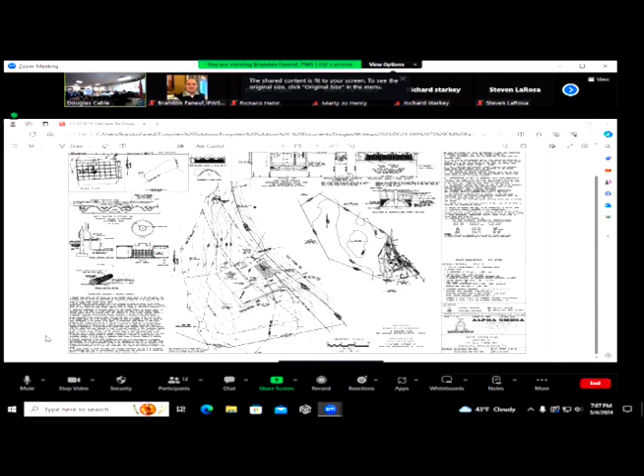All right, so here is side by side what was approved before. That's the house size and the septic, and that's what's approved. What we're proposing is a much smaller house, much smaller septic.

The only difference is that the wetland used to be only to the property line here, but we found more wetland in this area, and we flagged that. Brandon walked the site today, and he moved one of the flags a little bit farther, but it didn't affect much on the project. Other than that, all the work is outside the 50-foot buffer except a small corner of the house. We came a few weeks ago to talk about that before we submit the plan.

So this is what we have right now. The septic is outside the 50-foot buffer and the reserve. We have the well right there. No work basically in the 25-foot no-disturb area except the well area only, which is temporary alteration. Other than that, it's much smaller house, much farther away from the wetland, as you can see.

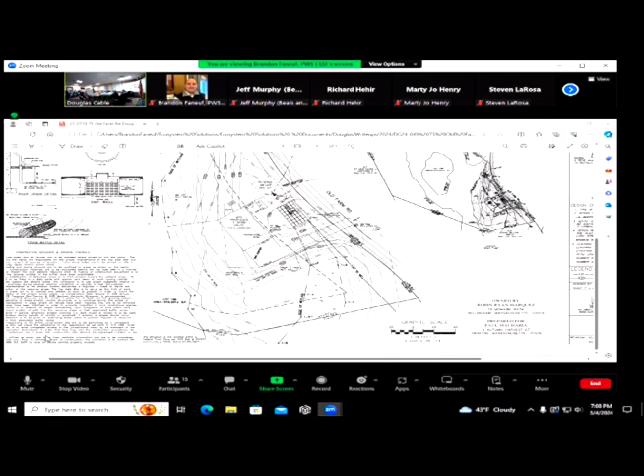Okay. Over there, and start sharing those. What you can do is start right here, then you can just scroll through them like one every 5 seconds or so.

So the wells, oh, I see it on now. Yeah, okay, I see it down. It's almost the same location as the old well, the approved well location.

That's still not in the 25 foot. The well, it's close, but yeah, it's close. But that follows only the line that's down, is only temporary disturbance. Just drill the well and never touch it again. It kind of circles around and it comes out. That's for the well pit itself, during the construction. Yes, okay.

And Brandon, he walked the site today. The flag he flagged was moved about 10 feet north, and we were able to adjust that in the revised plan.

Okay, Brandon? Thank you, Mr. Chairman. If you look up at the screen, you'll see a general overview of what the site looks like. It goes downhill from the road. That gives you an idea of the grade change, because in order to make the road level in that area, they had to build it up.

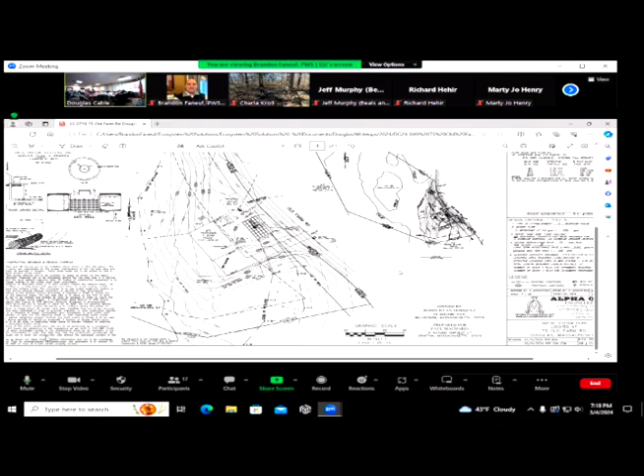Also, my well isn't really shown on this plan. There's just a line here saying 'to well, 135 feet,' but I've never been notified that a surveyor was coming onto my property to measure anything as an abutter, so I don't see how they could have located that accurately to determine the distance. I also haven't seen anybody, and my cameras haven't picked up anybody, which they would have.

So yes, I question all these things. Also, wells have to be 50 feet from a septic tank and 100 feet from the leach field, and none of these things can—both the septic, leach field, and the home cannot be in the 50-foot buffer zone, and in this proposal, both of them are. So it doesn't qualify as far as our conservation bylaws, and it also doesn't qualify because of the Title V issues with the plan.

That's, I think, all I have to say. I had a—

$3,000 well repair when a home was built across the street. My neighbor, he's present as well. And then his neighbor next door, his septic system, which was approved by the Board of Health in Douglas, failed. I wound up having a $3,000 well repair, and I saw the well repairman at several homes right in the adjacent area when new homes went online. So that's my input. I don't see how you can approve something that doesn't comply with both our wetland bylaws and Title V.

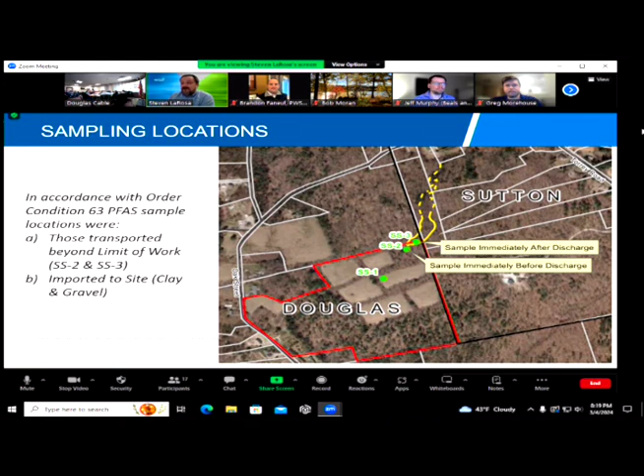And then that way we were able to dig into those 2 piles of imported material to analyze those. The results, I know there's a lot of numbers here, but the sample results are the last 3 columns for the RCRA 8 metals and phosphorus. We did see a number of these metals, which are naturally occurring, so we didn't expect to not see them. All of the concentrations observed from all 3 samples were below the reporting concentrations for sites within 100 feet of a drinking water supply in Massachusetts.

And one column here talks about natural soil. These are the concentrations of those metals anticipated in soils. All of the concentrations we observed were within those numbers or less than those background concentrations.

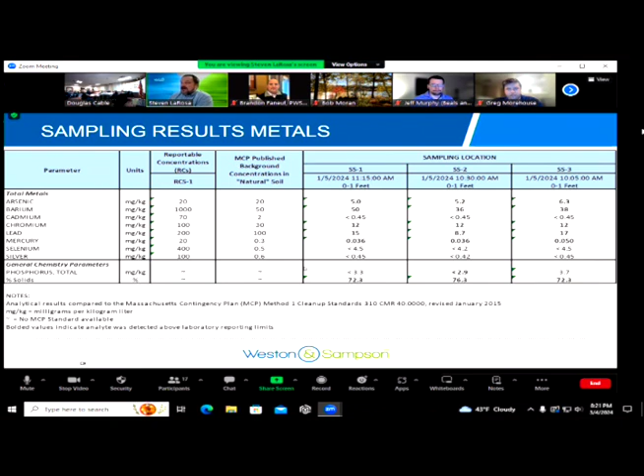For the PFAS concentrations, again the last 4 columns here are the samples we collected. The easy ones are the imported clay and gravel. There were no PFAS identified in those samples of any of the 40 that we could see. In the SS2 and SS3 samples, what we're showing here are all of the compounds identified within at least one of those samples and the state of Massachusetts regulated compounds.

So these middle 6 compounds are the ones regulated by Massachusetts. All of the concentrations of PFAS that we saw in our samples are below those reporting concentrations. Additionally, I've included some background concentrations developed by the states of Vermont and Maine, and all of the PFAS concentrations we see in our soil samples are below those typical background concentrations seen in those other 2 states.

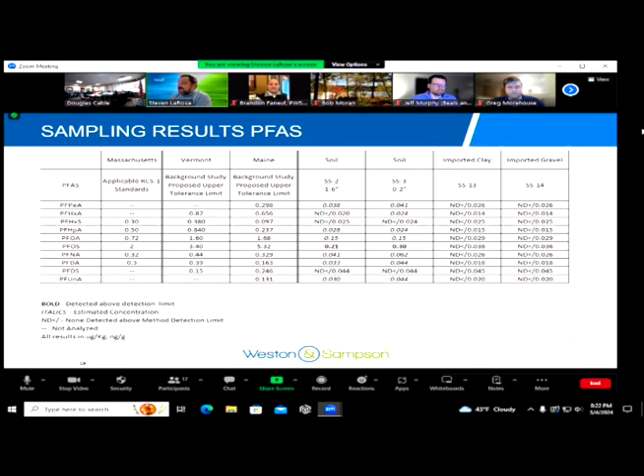So our conclusions: the soils associated with the property contain RCRA 8 metals at what are deemed natural soil background concentrations for Massachusetts. The PFAS samples for soils on property show concentrations well below the Mass DEP reporting limits and even below the background concentrations seen in neighboring states. The imported materials contain no detectable levels of PFAS.

So we believe that the Conservation Commission order required soil sampling has been completed and that the results indicate there are no contaminants here associated with all the analyses we've done, and that no additional sampling or analysis are warranted. Okay.

Brandon, you got anything? On this first topic, yeah.

Okay, so guess some updates from the last time we talked. The Conservation Commission required that the applicant's engineer relook at Basin 5 and its functionality.

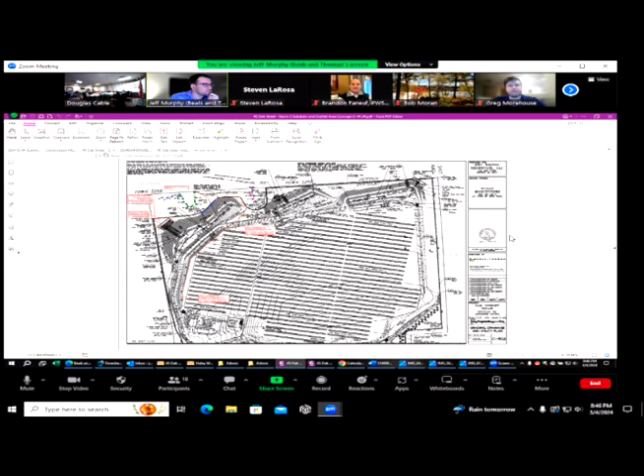And then I think we've talked about Basin 2 - the way that's being addressed in the short-term construction period is that water from that basin, now much further along, the wick drain pipe is now installed in the floor of the basin. As Pat said, as conditions allow, when there's another good window of weather, that's when they're going to install the outlet control structure, outlet pipe, and the outlet pipe from the wick drain. In the construction period, so they don't have to rely on dewatering the basin through pumping,

the wick drain is going to be the mechanism in the short term that will allow them to draw the water down in the basin as needed, versus pumping it. But obviously continuing to monitor the conditions - that can only be done if the water is sufficiently clean to discharge to that location. So of course they'll be monitoring that as conditions go forward.

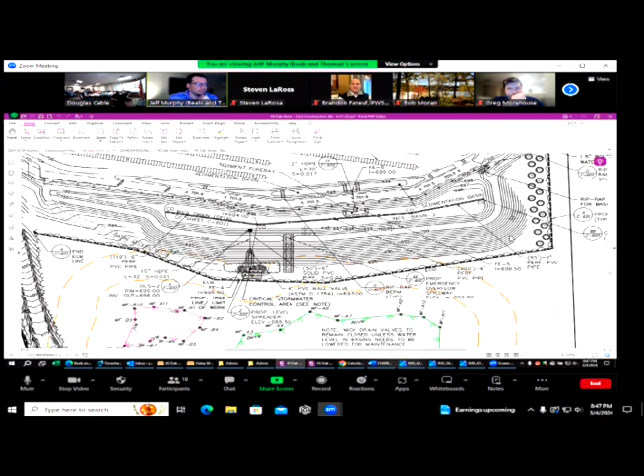So the 6-inch ball valve, that's what's draining down the sediment ponds? There's a wick drain underneath the pond that's like a 6-inch perforated pipe, and then there's a solid pipe that leaves the wick drain, with a valve on the end that can be regulated to control the outflow of the wick drain, which discharges into the riprap swale that goes to the level spreader pool at the base of the slope. And that feeds off that pipe on the bottom of the retention pond? Yep, so that's the wick drain, but that's not the main drain of the pond.

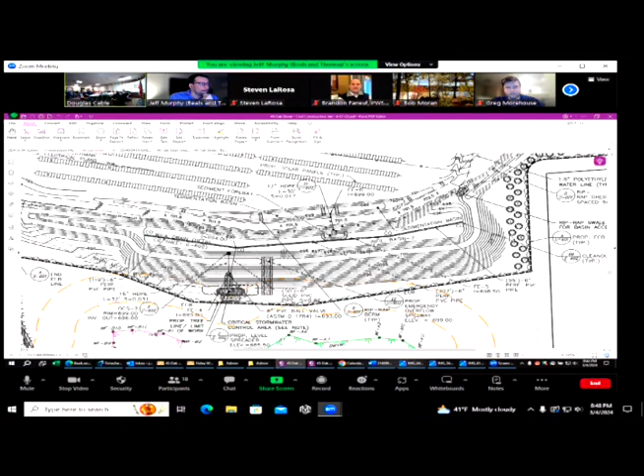Well, what I'm getting at is, there's another main drain - the silt's going to settle to the bottom, right? Right. And now you've got a pipe there that we're going to open up and drain out, so the silt's going to go with it. So it's wrapped in fabric, and it's got crushed stone around it - crushed stone, fabric wrapped around it, crushed stone, then a layer of crushed stone on top, and right now we've got an additional piece of fabric on top to keep the stone clean during the construction phase. That would be taken off and replaced. Once the site is fully grown in, we'll take that top piece of non-woven fabric off.

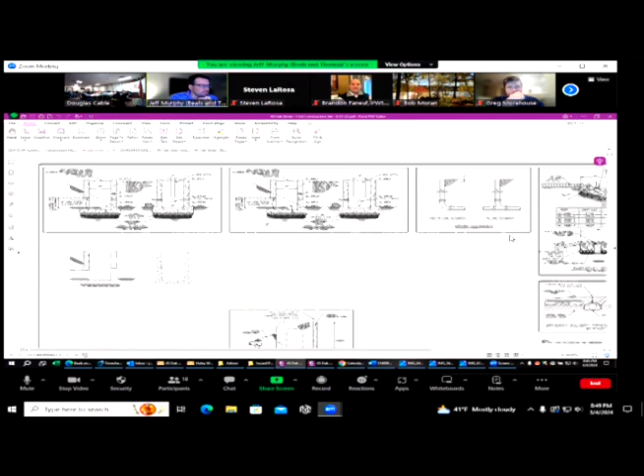I'm just trying to get an idea of how this thing's supposed to work. So that's the wick drain, but the main function Jeff could probably explain is the outlet control structure. Yeah, so each of the basins have a unique outlet control structure. So this is the detail for Basin 2. So the basin bottom is here. So this structure is going to be facing inwards towards the basin, the side of the structure.

So it's going to allow the water in the basin to pond up 6 inches before it reaches this lowest outlet orifice. Once the water gets to that 6-inch depth mark, it will flow through this opening and then into the outlet control structure. This on the left is a side view. The water will come through the structure and then into that outlet pipe.

And then it'll go into that riprap swale that you saw on the previous plan that goes to the base of the slope, to that oval-shaped level spreader pool, which is intended to fill up. It has that concrete curved weir that is going to spread the water flow out across a wider area before it leaves the limit of work.

Okay, so I guess short term, the water in the basin is going to be managed through pumping until such time that the water is clean enough that they can start to use the wick drain to release the water.

And then certainly once the vegetation starts to grow in the spring, that should improve the clarity of the water entering the basin as well.

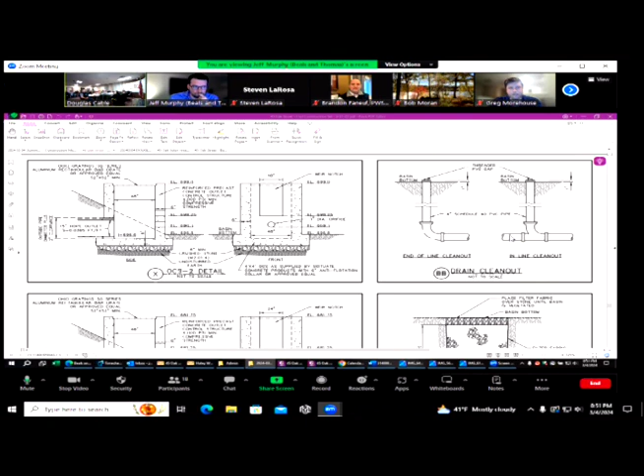So basically, the way this works is that the bottom of the pond really isn't accepting water. You're doing it through the 6-inch pipe, correct? To control the level. So the wick drain is really meant to be a maintenance tool.

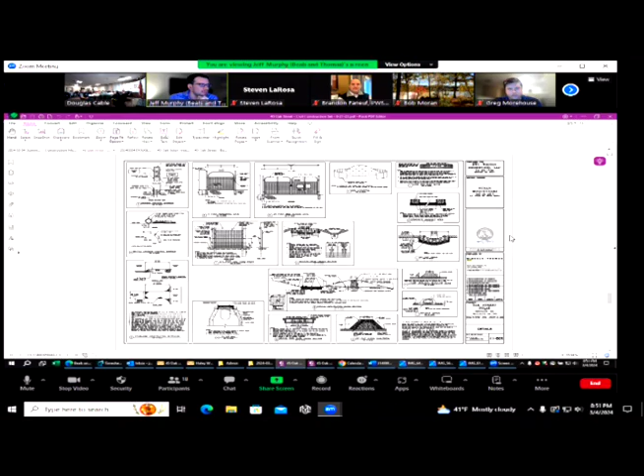So in the long term, the intent is, here's kind of a quick cross section. The wick drain pipe is installed, it's basically a stone lined trench in the floor of the basin.

So in the long term operations, the goal is to have that wick drain pipe just basically sitting there, and then have the valve closed, and the water will pond up to that 6-inch mark before it actually flows out of the outlet pipe.

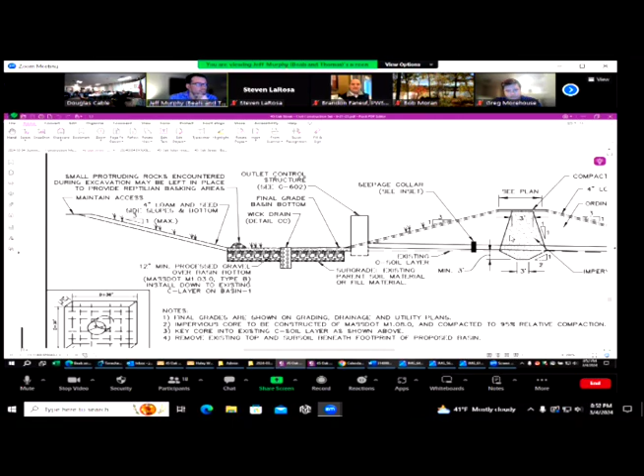So we're essentially impounding that first 6 inches of water, and that's the goal of what we ideally would want to infiltrate into the soil below, which we know is probably going to go very slow.

But again, we did install this gravel layer at the bottom of the pond, and they mucked out the sediment that was there before installing that gravel base there.

And they're likely going to have to do some additional rehab and scarification of that towards the end of construction, after things become more stabilized.

And one of the things that we did talk on site about with Brandon and Doug Bush of Haley Ward was, originally we had intended to loam and seed the bottom of the basin, but given what we've seen so far with the soils being so poorly infiltrating, we're throwing around the idea of potentially not putting loam and seed down on the floor of the basin.

And trying to just keep that gravel layer, in an effort to basically improve or create a best case scenario for the water to be able to draw down. The side slopes will still be loamed and seeded, but just the floor of the basin, we're thinking it may be best to not do that.

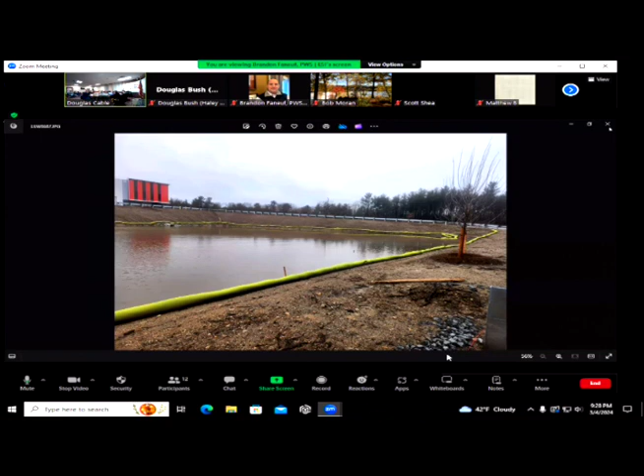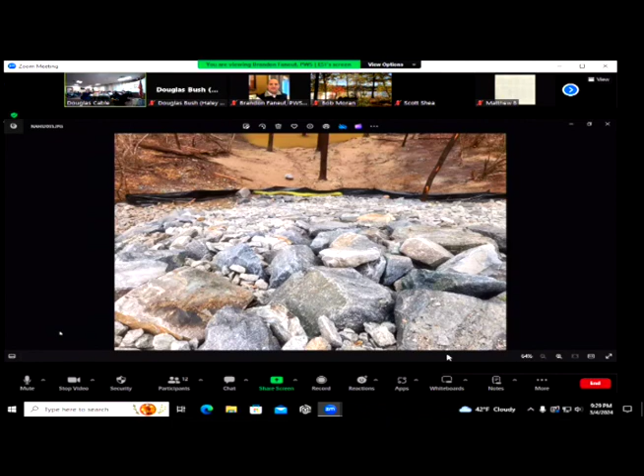Okay, so here's the pond, the level, and you can see that the water's not crystal clear, but you can see what the level is. You want to go to the next one? That's just looking the other way, up towards Hartford Ave. This is down the embankment. As you cleaned it up, you see the water at the bottom? It shows a lot of sediment there.

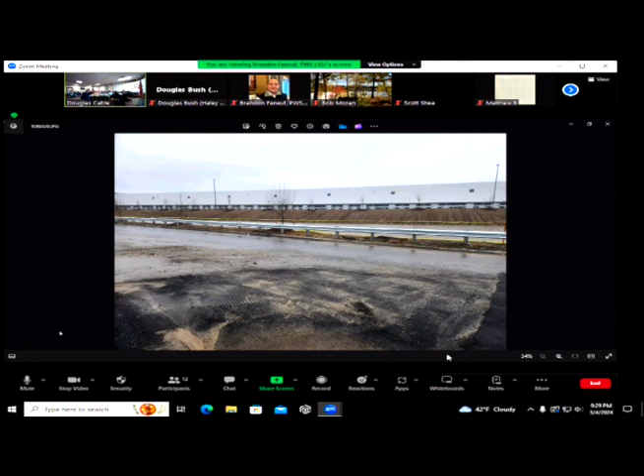That's the catch basin showing where they are, the ones that you repaired and put in. Right there, you can see the water right below the grate. I can't tell if those have baskets in them that need to be replaced, but I can go out there tomorrow and double check all these, and also meet with my contractor to make sure if there are silt baskets in there.

Well, when I looked in them, like I said, I seen water. So whether you had a basket underneath it, I don't know, I didn't see any telltale sign. Normally you see it on the edge. You would, yes, and I'd like to double check, but I'll get it addressed.

And that's the one that's opposite, that washed out on the other side, because you got two of them there. You got one on that side, and then where it washed out, you have another one. Both of them were exactly the same, and they look to be about the level of the retention pond. So with the sediment down there, I'm saying, where's that coming from? Is it residue from the other rain, or what? But we didn't have a high rain event on Sunday.

I just thought it was kind of odd that these would be full and we'd have that much water, you see how cloudy it was. Yes. So I'd like to have some kind of idea what's going on there, have somebody look at it, and give the commission a report as to what's going on.

Now, the bankings, I know we talked about it, they were supposed to be dressing those bankings. Do you know when that's going to happen? That area is actually going to be covered in riprap, starting at the end of the month, when we do the whole restoration. Not the whole bank, but the section where the low point, the washout is, will get all new riprap, and the remainder will be sprayed for seed and stabilized with whatever we need. But what I'm talking about is not that one there.

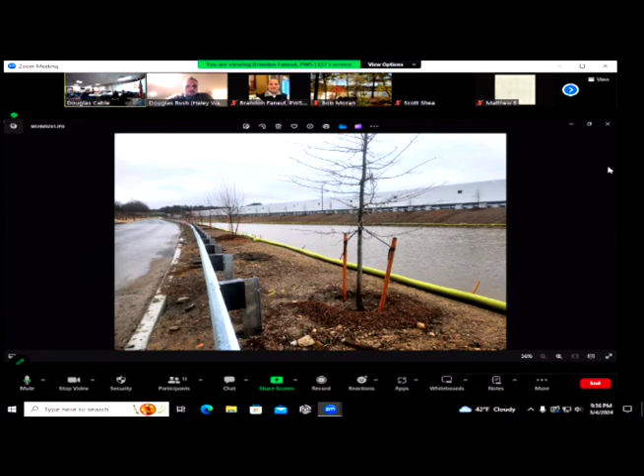27 inches of 12 to 18 inch stone at the top with filter fabric creates a barrier for vegetation to establish a root system and grow. There's more to it, but Beals has addressed your concerns.

Having noted the above, we believe it would be a simple addition to the overall O&M manual to require quarterly inspection of the riprap slopes and hand removal of any vegetation observed to become established.

Okay, so what I'd like to do, Brandon... Who's the engineer we have on? Doug Bush. All right, so maybe forward this to Doug Bush so we can take a look at it rather than reading through it ourselves, and get it on the next review.

Acceptable? Yep. And that'll give you a chance to get me the topo maps I've asked for. Yep. And you want information about the catch basins? Right.

With the storms coming, I've spoken with my environmentalist. If we need to, if it starts to reach the peak, we've got a plan to pump the water through filtration bags and into my storm detention basins where I have room for water storage.

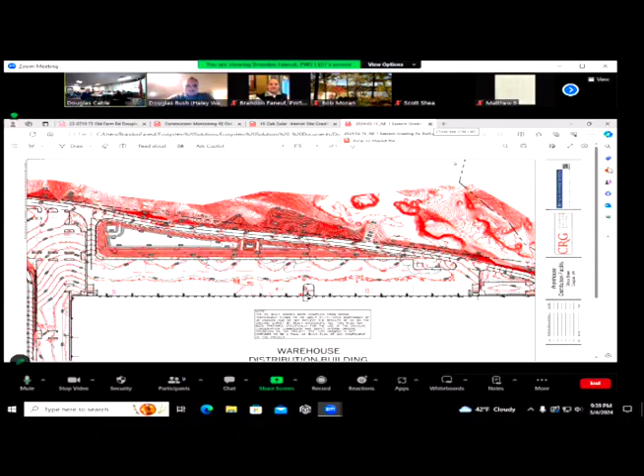Send me a full-size paper copy. Trying to do it on the phone is a little tough. We need a full-size paper copy of that as-built. Okay.

Anything else, Brandon? No. Anything from the floor? Anybody online want to comment on this? All right, so next meeting is when?

We're doing March 18th, but when are we doing the reviews on this? We're not doing March, we're doing it once a month for the enforcement issues. All right, so we'll do it in April then. April 1st or 22nd? We might as well do it on the 1st.

In the meantime, we'll send that report and your response to it over to the engineer. He can go through it, and if he has any comments, we'll know at that time. And get you the drawings. Yes, sir. Thank you.

All right, so next, we have the Lake Shore Drive enforcement order.